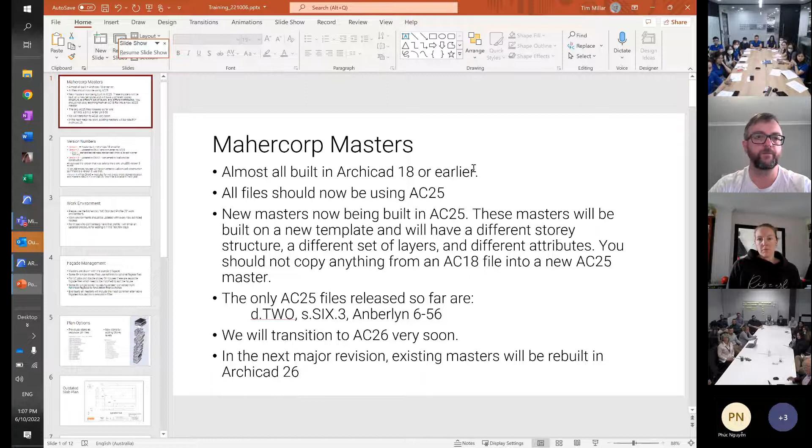Okay, the next thing I wanted to mention was version numbers. Hopefully everybody's across this, but I just want to touch on it to make sure we're clear. All files have a code number and a version number at the end. I renumbered those a while ago - everything that was here already, built in Archicad 18 before any of our recent upgrades, was version 1. It might have been built a long time ago or more recently, but they were all version 1.

Then we brought in DNA 1, a series of updates primarily aimed at the double stories, where we upgraded the staircases, or rather made the stairs standard. So all double stories should now have standard stairs. We also standardized the windows, and there are a couple of other little changes.

A lot of those files have been released, and a lot have been done but not released yet, and we're going to continue to trickle those through. But version 2 looks a bit different to version 1, and we've run into some trouble, because there was advice that in production you have to use the version that was sold, whether version 1 or version 2, whichever is correct.

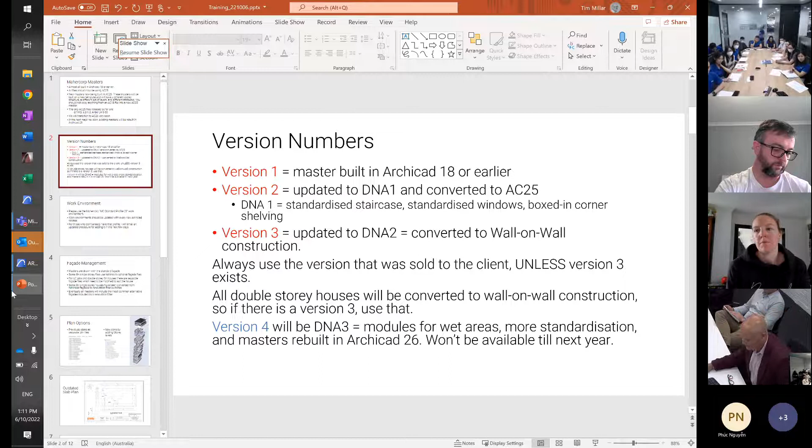Okay, work environment, I'm going to touch on very quickly. Archicad 25 - is everyone using the work environment that I set up in head office? Yeah... not sure, maybe. I would like everyone to use it, please.

For PG, I know I haven't made it available to you. I spoke with Di about this briefly yesterday, and I'm going to make it available for everyone over there as well. It has some advantages - it has a series of shortcuts, and if we're all working in the same platform, it's easier for us all to understand each other.

You will always be able to modify your own work environment, and that's absolutely fine, but we need to start at the same point, and then we can progress from there. If you've got your own particular modifications, then you can do that.

The other thing is, once we get 26, I'll modify the work environment and push out a new work environment for Archicad 26, based on the same thing but incorporating whatever new tools are in 26 - I don't think there's many. So I just want to touch on that quickly. In PG, I'll be forwarding something for you for that.

Okay, facade management. Facades have been managed in different ways over the years. Some of them have still got hot links, some of them have to be pulled from separate folders. What we've been doing is changing them all to renovation filter switches.

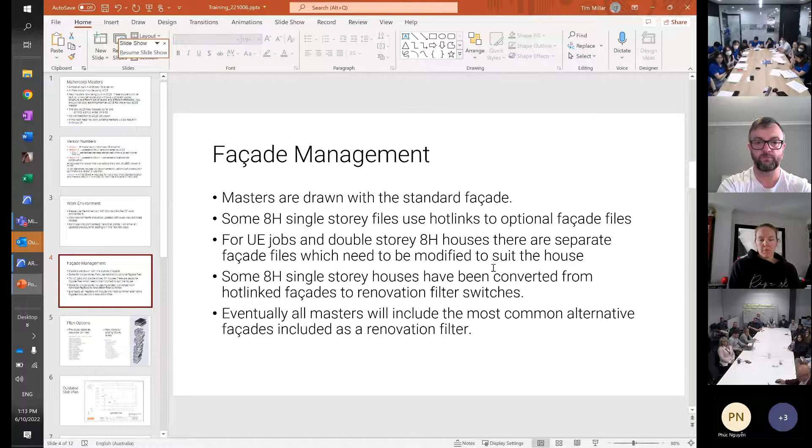I'll see if I can make this work. So far, we've only done it with the single stories. Has anyone encountered one of these yet that Armani has? Anyone else? No one else has seen one? We've done this with quite a lot of files, but they're not all available yet.

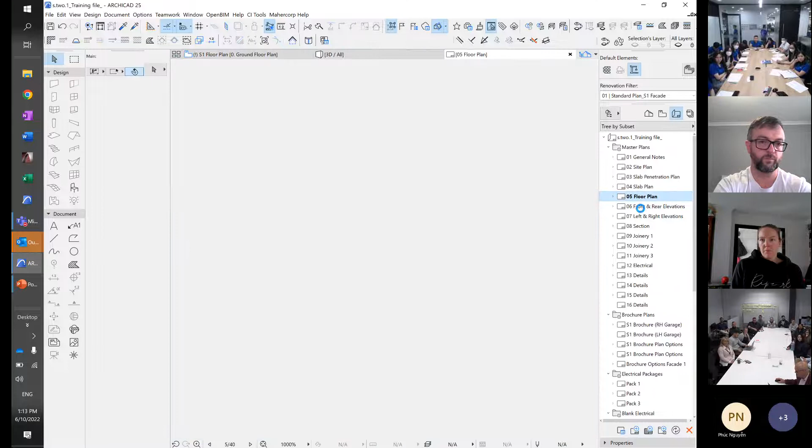We don't want the view layout. So this is the standard master with a standard plan. We have taken the separate facade files and put them into the master and then pinned them with a renovation filter switch. To make this work, you've got to be able to turn on the renovation palette, and we've set up different filters here with each facade linked on it. So all you need to do to change a facade, if a client has selected a different one, is change the filter and the master will change automatically. You don't have to link anything, change any layers, or do anything else.

What we've done with most of them is set up the most commonly sold facades. So I've got the S2, the S3, the S4, the P12 and the P6 for 8 homes singles. Eventually we'll do doubles, and hopefully one day we'll get to UE as well, but that's probably a long way off still. But it's helpful on the higher selling single stories.

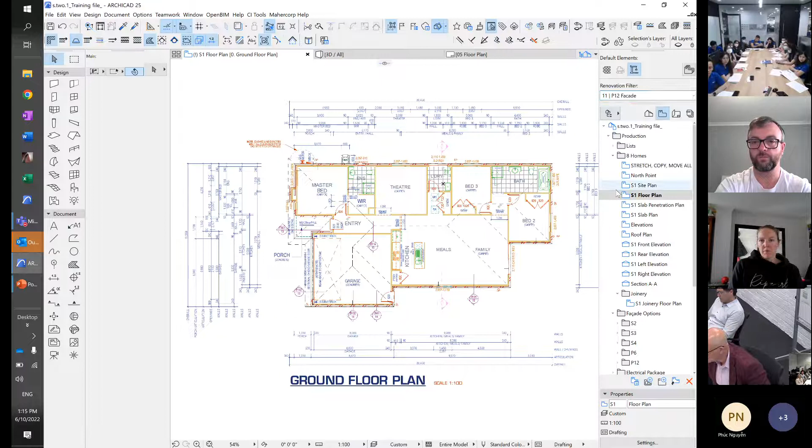It was also being done for estimating. It makes it easier for the timber truss to be able to quote on the jobs. So we can switch them quite easily, very easily really. You just select the correct filter. It works in 3D as well. You can switch there and it'll just automatically change straight away.

So that's going to save time for production when you have to manage facades. I'm trying to get figures, or I've been hoping to get better figures on which facades are sold how often, but we'll keep the most popular ones in there.

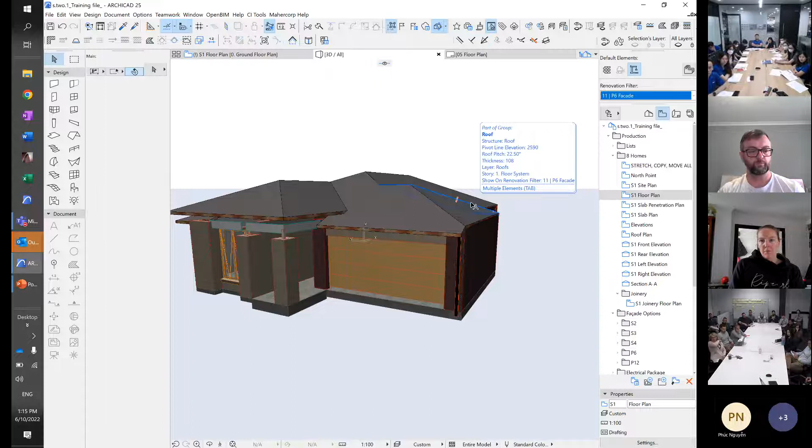This is something that we're wanting to do, but because of the number of facades, the number of houses, we're never going to get all of our files converted like this. But we'll do our best and work through it. Everything's on hold for the time being while we're converting to wall on wall, but we'll get to it.

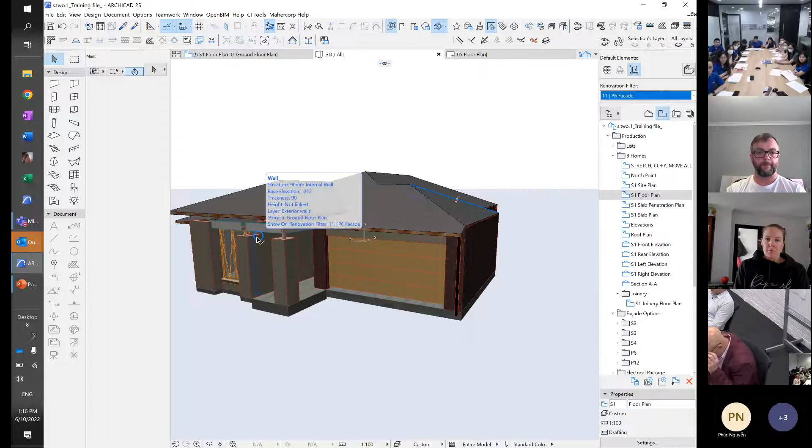So that was facades. Where are we? That's facades. Plan options.

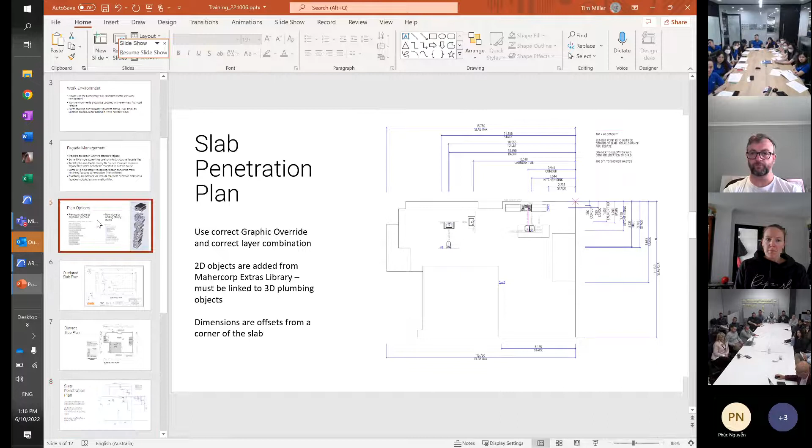Plan options in the past have been done as a saved master with the variation done on the copy.

What we're doing now is taking all the plan options and putting them into different stories within the master. One of the issues we've had is the number of files we have to manage in the development department. There are like 150 different masters, something like that. Every master's got 10 plan options and however many facades.

There's just way too many files. So we're trying to incorporate all the elements of each master within each master file, so there's less management of different numbers of files. So facades are done with the renovation filter switch. Plan options will be done as different stories. So you can see, I'll show you with the Jardene.

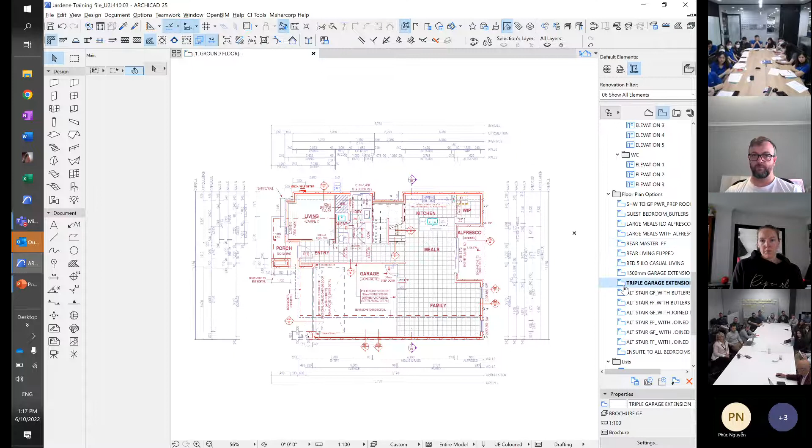So that's the plan. You can see in the views, we've got floor plan options, and each of them are named there, and they're within the master as a different story.

The plan options are still being only managed at brochure plan level, so you'll still have to do a bit of work to tidy them up. When you copy them from this story and put them into the main master level, there's still going to be a bit of tidying up to do, but at least they're there in the same file.

And then if a change is made to the master, we'll update the whole master and not have to manage a whole bunch of different files.

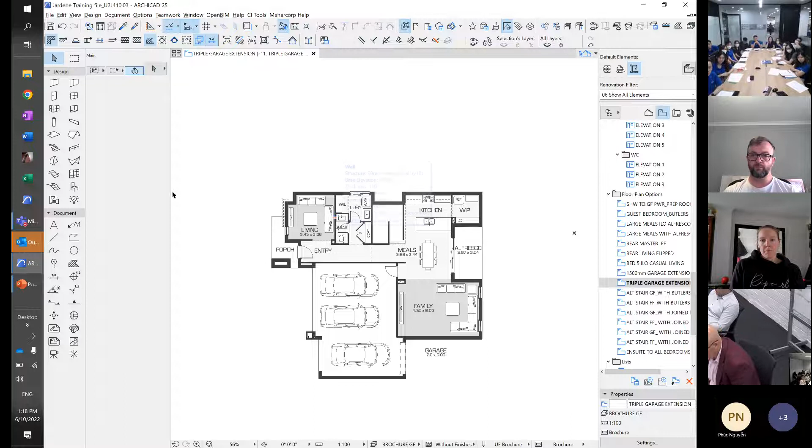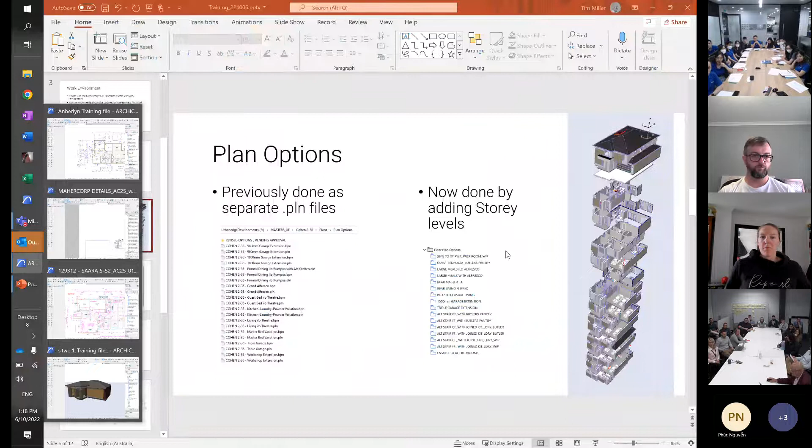Because they are, if we look in 3D, that's not 3D. Oh, it just shut itself. Okay, that's a screen. This on the right of the slide here is you can see a shot from the master in 3D. You can see all the stories are, all the plan options are stacked together.

They're all in their correct position relative to the floor plan. So you can use trace much more easily than if you, so you can see how the elements relate to each other within the file. So if you turn trace on, you can see what you need to remove from the main level before you copy the new elements back up.

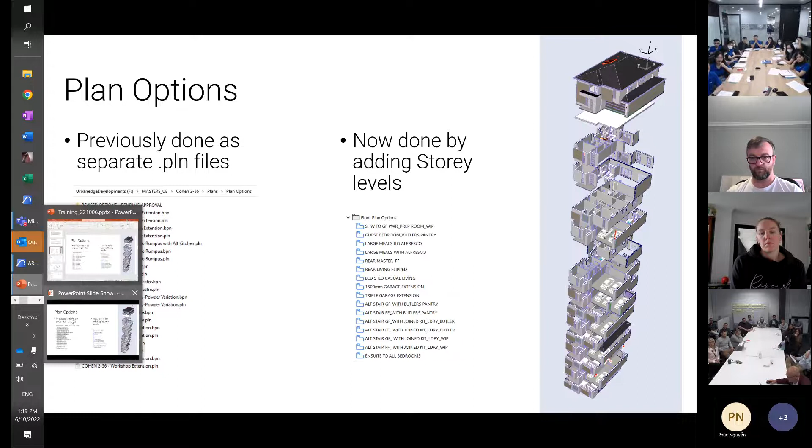Now, I want to just talk about a couple of the plans that we've been adding. The slab plans have been in our masters for a long time, and they look like this. As we've been working on the masters, we've been trying to improve the slab plans, and they now look like this.

I just wanted to mention it and show them both because I thought I saw an occasion the other day where the plan had been reverted back to the earlier version. It might have come from one where it was version 1 rather than version 2. But if you've got the updated slab plan, please use that. If you have the old slab plan, then and we have to use it, that's okay.

But this detail down in the corner is not much good to us. It really doesn't do anything except show the dimensions that are already on the main plan. It's not very helpful. We have updated the detail of the corner of the garage, and that will be in the details manual.

I'm going to go through that a bit more probably next week. We'll confirm how we're going to use that detail, but this detail in the corner of the garage has been causing some problems on site, and we're going to change that. We have changed it. It's just the detail hasn't worked its way through the masters yet, but I'm going to push something out so that we can get that updated. This particular detail, with just these enlarged dimensions, is no good.

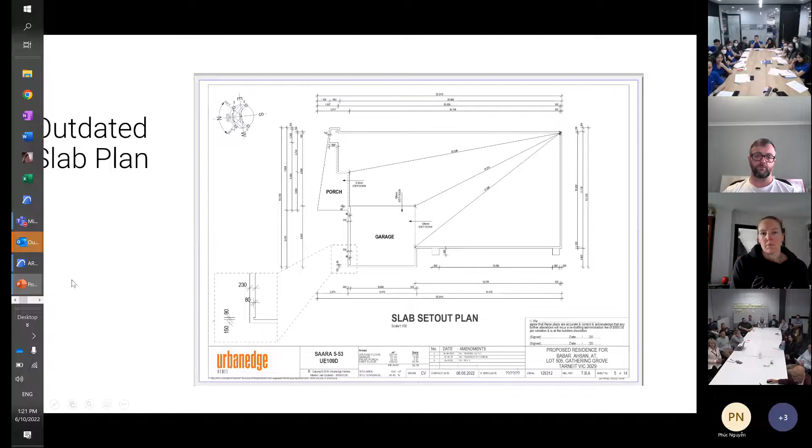So on the updated slab plans, the dimensions go to the outside corner of the slab so that the concreters can measure their boxing and make sure that it's been done properly before they pour the concrete and discover that it's wrong when they check the dimensions. That's a small detail, but I think it's helpful.

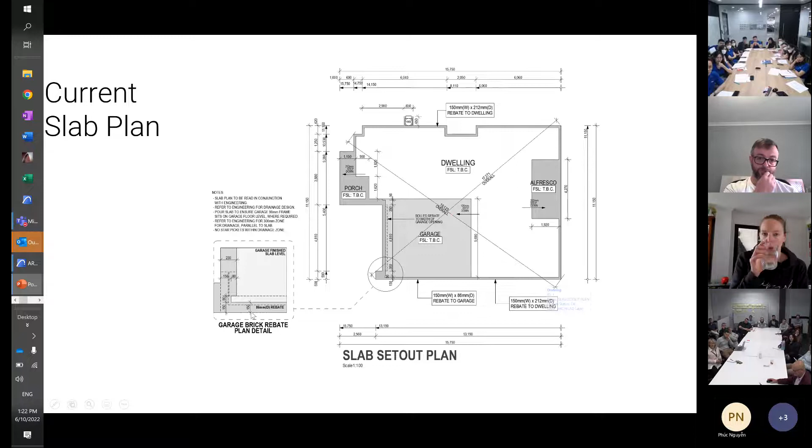The updated slab plan also has running dimensions, which concreters, I believe, prefer to use when they can. And we've got some shading just to make it a bit clearer where the boxing on the slab goes. So they're being built into all the masters, and they'll continue to be updated. You can see the difference in the detail here. This isn't the updated detail, but we're going to change that fairly soon.

Next one I wanted to talk about was the slab penetration plans. These have been overdue in our masters for a long time. The plumbers have been asking for them for as long as I've been here, and I believe before that, and they should have been on the plans, but we haven't been able to get them on. So they're being updated now, and a lot of masters have them now.

I'm not going to be asking production to add them if they're not there, because it's a bit messy at this stage. We might get to that, but not at the moment. So if they're in the master, you can use them. But a couple of things I want to just point out. This is the format of them. They're very simple. It's the shape of the slab and only the slab penetration points.

So we turn on the wet area fittings, and then we have to add a 2D element which is aligned to the 3D object that's already in the plan. The reason for that is that the penetration point doesn't always line up with a convenient hotspot on the 3D object. If there was always a hotspot in the correct place, or if I had the object editing knowledge to put a hotspot in the correct place, I could maybe fix that, but I don't have that knowledge. So what we've elected to do instead is to add a 2D object that sits on top of the 3D object.

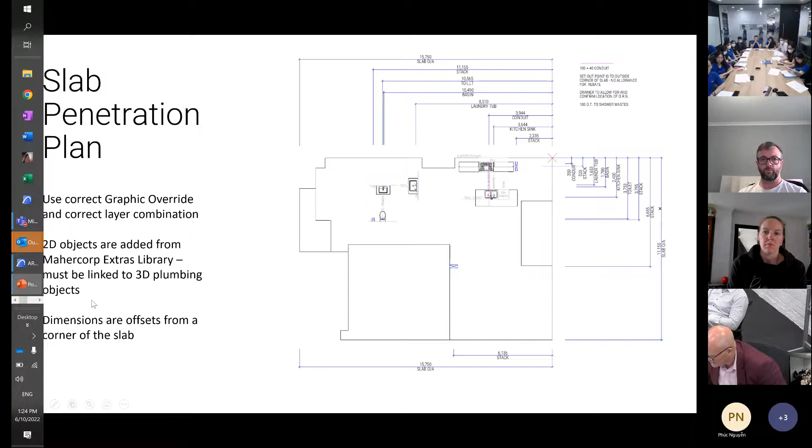The other thing is that you could, but I do still want a separate slab plan to a slab penetration plan, because the plumber wants the slab penetration plan. He doesn't really care about what's going on with the slab. He only needs to know where it's going to be. And the concreter wants the slab plan, so there's different information on it.

You could combine them, but for tradies that have got very specific jobs, I prefer to have a specific plan for that trade, so they can pull that sheet out and that's all they need to know, and they can move on after that. Similar to electrical plans, we have separate electrical plans because our electricians need to know that information, and they don't really care about all the other information that's bundled into everything.

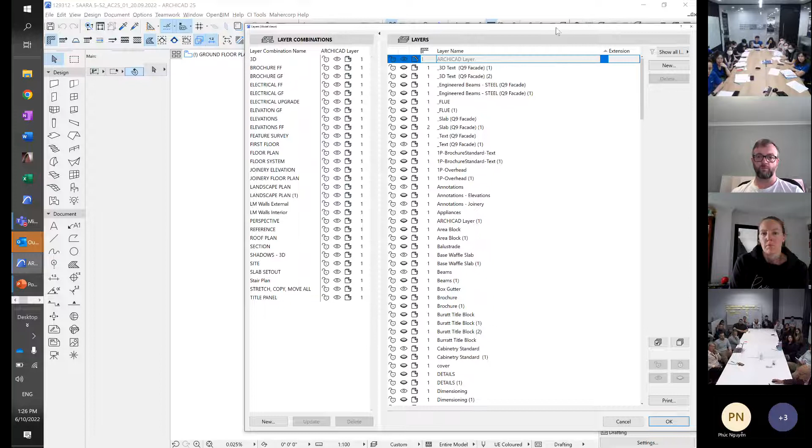Attribute management. There's been an issue with duplicate layers occurring in some masters. Why didn't that come up? Here we go. If we have a look at the layer structure for this plan here, you can see that there are lots of duplicate layers with a little number after the end of them to indicate that it's been doubled up. Now, I've been trying to reproduce this error and I haven't been able to do it. Does anyone know exactly why this occurs?

No? Isn't it just when you're copying objects over and then you just keep adding the layer? It could be, but I wasn't able to reproduce it. So I just wanted to talk about a couple of issues that are related to the same thing. Layers are attributes, they have attribute numbers. The first thing is that you should be careful when you're copying anything from one file to another, not to copy more than you need. Copy the element that you want and put that in. Don't highlight a whole drawing and then drop that in, because you'll get a lot of duplicates that you don't need. That's the first thing.

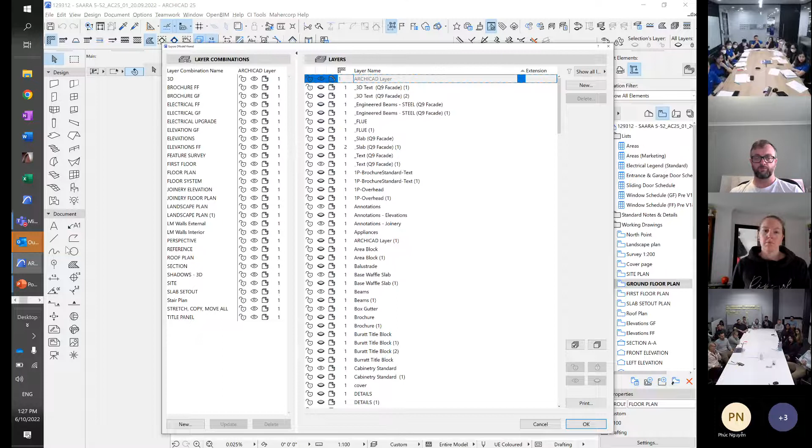Second thing is if you've got two things with the same name but a different attribute number, you can sometimes get duplicates. I wasn't able to reproduce that here, but I believe that can sometimes be a cause of the issue. The other thing that may be related to this is when you copy... go back to my slide.

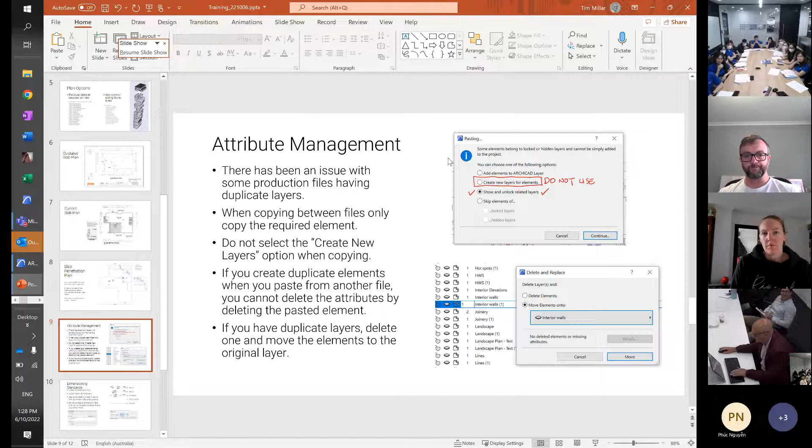When you copy an element from one file and paste it into another file, if the layer that that element is on is turned off, you'll get this warning message here saying you can't simply add it, you have to do something. You can either add it to the Archicad layer, you can create new layers for elements, or you can show and unlock related layers.

I wouldn't have thought people would be creating new layers, but just in case you're thinking about it, don't. That will create new layers. I don't think it's what's caused this issue here, but just in case, don't do that. Show and unlock the related layers, or add it to the Archicad layer. It's fine to add it to the Archicad layer and then assign it to the layer that you need. That will actually probably work better than trying to paste the layers in and creating multiple attributes when you copy across. It's a bit more mucking about though.

The other thing is try and minimize the amount of copying between files. I know it's really important and unavoidable to do that in production, but if you can avoid it, if you can create something within the file, I'd prefer you did that. I know sometimes you just have to copy between files, so if we have to do that, we have to do that. I know we've got a lot of reference files in production that are being used.

We are going to work towards phasing those out so that new masters make a lot more use of favorites, and that everything you need is within the master when you start. So you won't need to go to reference files. There'll be mod files, there'll be links, but we won't be using separate reference files as much as we rely on them now. I know it's unavoidable for the time being, but we're going to work away from that if we can. And especially when we start building in Archicad 26, the favorites will be built in as part of the file.

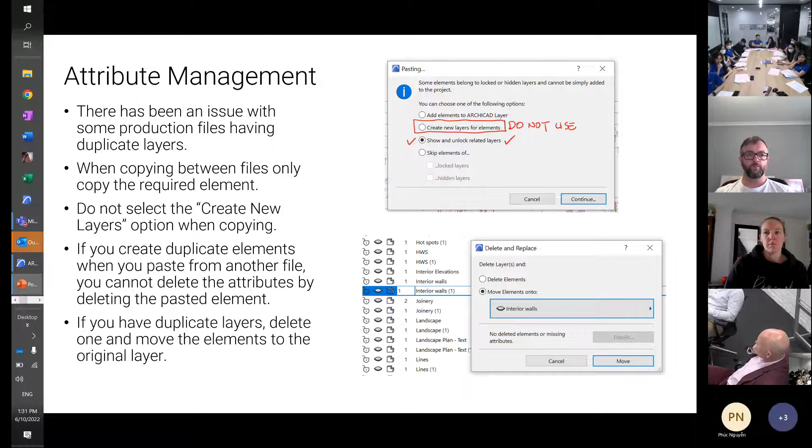The other thing is, if you do have them, please, can you tidy them up? What you need to do is, if you've got duplicate layers, like on this example here, where you've got interior walls and interior walls 1, delete one of the layers and move those elements onto the layer that you need to keep. If you don't clean it up like that, you're going to mess up layer combinations, and you'll mess up area schedules, and all sorts of things will be wrong. So this file in particular that I was looking at was a real mess, but it's happened in a few, so please be mindful of it, and please try and clean it up if you see it. Okay.

Purging is fine in production. We're not going to do it in masters. Has anyone purged layers or purge attributes now, or we don't do that? No. Essentially, because we've got such high turnover in production, if we get a file and it's a mess, we just leave it a mess, yes. Do our change and move on. Yes, and I understand that, and that's the way it is.

And what I really want to do is make sure that everybody in production gets fewer files that are a mess. I would really like to change that, and we're working towards it. It's not always from masters. It's historical. There's a lot of issues. We're going to change it as best we can. Production doesn't really have the time to clean these things up, but if there are issues created, then let me know. If there's anything I can do in the master to reduce that, then we will do that.

I think there's a lot of scope for our drafting, production and efficiency to improve. I don't think it's necessarily recognised across the company how much scope there is, but I think we can make a big difference as we continue to improve the masters and improve the efficiency and the quality of our drawings. And we're going to get there.

Dimensioning. We've changed our dimensioning standards. I sent out a document, and I don't know whether everyone here has seen the dimensioning standards document. It's available on the F drive. It's just a couple of issues. In Archicad 25, it's now possible to add room names or notes underneath the dimension. It wasn't possible in Archicad 18, so none of our masters had that. Does everyone in PG know how to add a note underneath the dimension? Don't know. Everyone here knows how to do it? They've been doing it? Yeah, okay, so we're all good with it.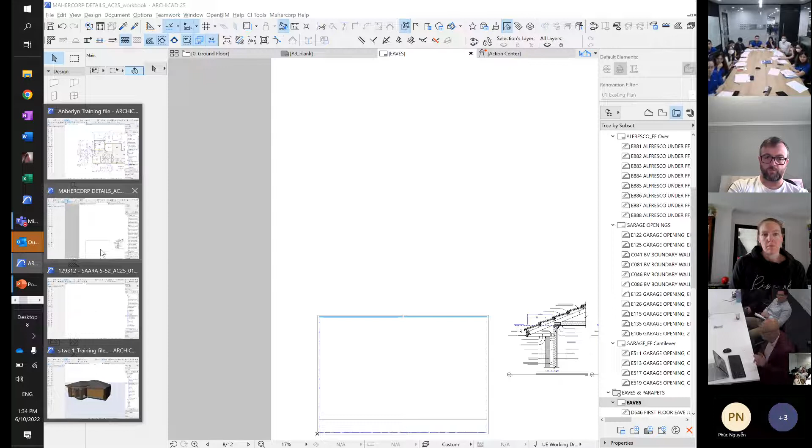So please, I'm not expecting production to redo the dimensions when they come from the master, and maybe they're not perfect. You might have to tidy up a little bit, but you're not going to redo everything. I understand that. But it would be great and help clarity on site if we at least added the room names if they're not there. If you can take the time to do that much, just to tell people where the dimension is, it makes things a lot easier for tradies on site, for carpenters to read a set of dimensions. So if possible, if the dimensions aren't that clean, just check them and improve them a little bit. Again, in masters, we're going to keep on trying to improve the dimensions and make sure that all masters that come through are as good as they can be.

How do I make that go away? There we go. Yeah, that's better.

Extended witness lines again. Well, we're going to do that. I'm not going to get production to bother with that. I think dimensions look a lot better if you connect related dimension lines. Don't cross the dimension line with an unrelated witness line. I did see that the other day. It's not good practice, but hopefully fairly basic.

Okay. Sorry, Tim, just with that one. Yep. So if you go to see how there's the two 240 mils. Yep. Would you connect those two, or would you leave? Yeah, those, yes. And so you've obviously got an overall at the top of that, which isn't shown. It's off to the... yes. Yeah. Sorry, it's the other way.

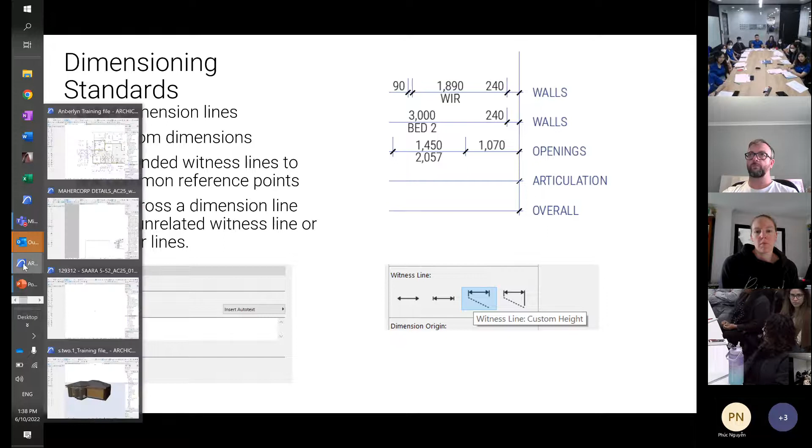Would it be worth moving openings to the very top, just so articulations can line up with the walls if you want to? No, the openings still show where all the ends of the walls are, because it's still showing the gap to the window and then to the corner. Your articulation will still hit that corner. Yeah. So, okay, we've got articulation runs through, and then the openings are broken by the articulation lines. So the offsets in the openings are on each length of wall, not across the whole wall.

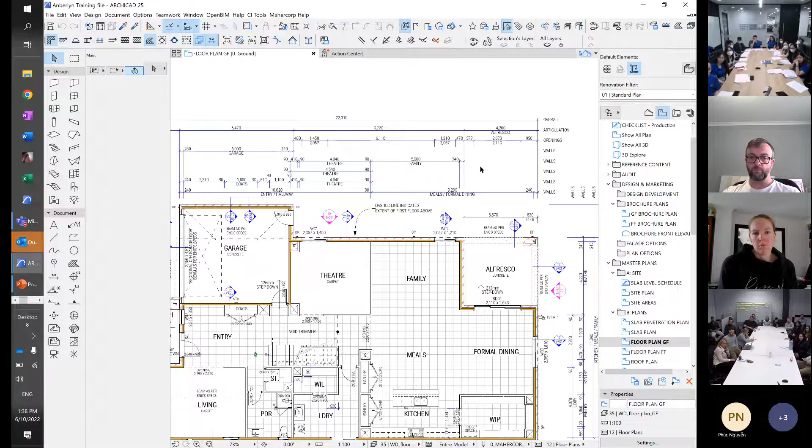Again, it's done that way because it works better for brickies. It's the tradies who are reading it, the carpenters and the brickies. So we want to set it up in a way that makes sense for them. So that's the way we should do it. Now something crossed my mind. So the number of wall lines there, I just want to mention. It just says walls, walls, walls, and they usually relate to a straight line through the building, more or less, give or take.

I have in the past... I'll show you this idea. I've added it to the Anberlyn. I think it works, but I don't know that it's worth the trouble. So you can see I've added grid lines here, A, B, C, D, and then down the other way I've got grid lines of 1, 2, 3, 4, 5, and on the dimension lines I've labelled the wall line by where the grid line is. So you can see very easily on the drawing where the dimension line runs through the house, and it's much easier to read what's going on.

I think it's a good system, but I've kind of decided it's too much trouble and it's not worth enough to follow through. But it's in that file, and it's perhaps worth bearing in mind on a big house like the Anberlyn. Occasionally it might be justified if it gets really confusing and you've got a whole series of dimension lines, just to clarify where they are. But anyway, I've done that, but we won't follow through with that one. Okay.

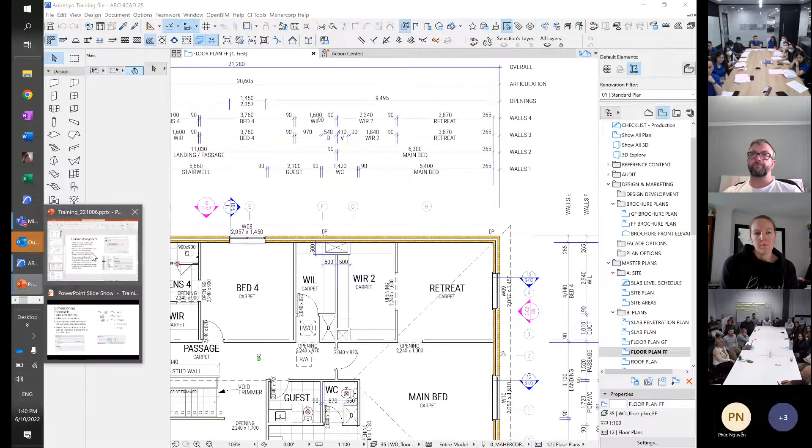Attributes, dimension lines, details. Now, how are we going time-wise? We've still got a bit of time.

Details have been a big issue, I know, and we're continuing to work on them, but we've been derailed for a little while. We have an enormous number. Chris has done a huge amount of work on drawing details, standard details for the whole company, across our range, and there are a lot of resources available that we have not yet properly implemented.

In the masters now, the details are going within the drawing set. I think that's the case with pretty much. Is that happening in all files, or are you still getting associated details? Most ones that are in Team 2, so the ACC space or production space, they're all still just associated details. They're still associated details, yeah. So we're working away from that.

Sorry. I think the S3, the new master, it's got details in there. Yes, I think that's the new ones. Version 2 and version 3 should both have details within the working drawing set, and we will be working towards that being the case for all masters. It hasn't seeped through yet. When the masters are done, they will include a set of standard details.

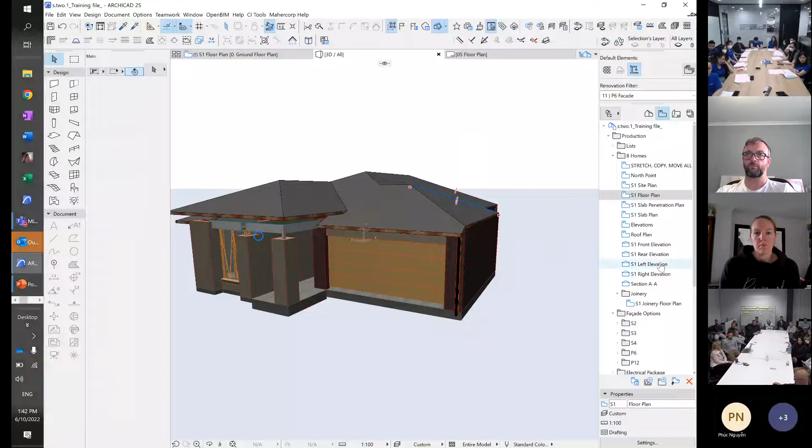So it'll look like this. Everyone will have seen these, yeah? So they're coming from the details manual. They're coming from the details manual, but if we copy them directly from the details manual, then you have to set up a link to that drawing back to the details manual, which can be a bit of a pain.

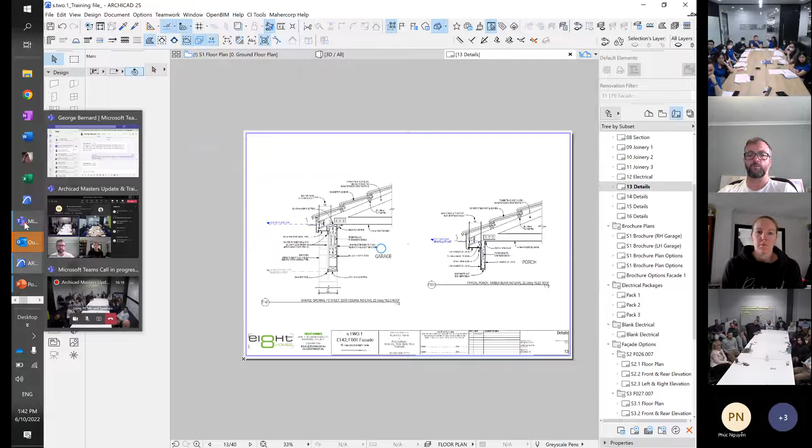I'm working on putting together a details workbook, which is like an interim file that will include most of the most common standard details that you might need, that you can then drag and drop from the details workbook into the production drawing. Masters on the whole will have them, but if you're going to add them, we'll have the details workbook, and you should just be able to add that easily.

If we have a look at the settings. Is that going to open for me? Oh, it's tired. There we go. So you can see the source file of that details drawing is going back to the Mahercorp details manual. It goes back to the F drive.

If you open the details manual and just copy the drawing directly from the details manual, because within the details manual it's an internal file, it will maintain an internal path and it won't be able to find it. So that's why it's helpful to have an interim file, a details workbook. There I've collected all of our common details, and then when you copy it from there, it remembers its path.

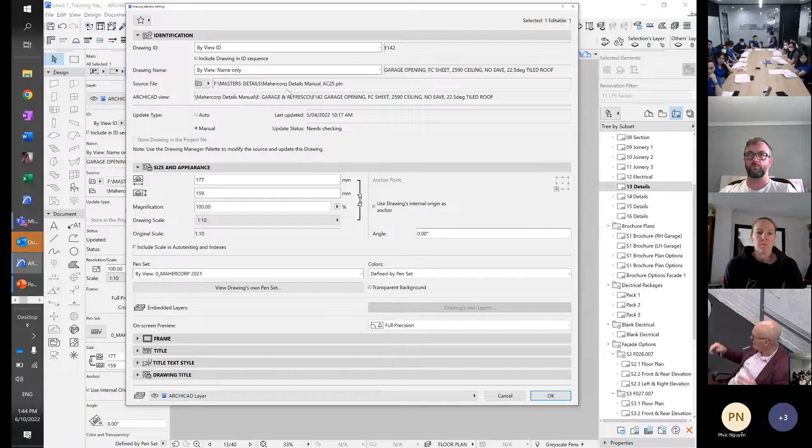So at the moment we have a reference file that has a lot of details in it that we're using in masters. I don't know whether production are using it as well. No, we're not. I'm in the process of setting up a workbook where we'll collect the most common details, and you'll be able to use it as a reference file. You'll just be able to copy a drawing from the details workbook and drop it into the production file, and it will work perfectly and stay up to date.

I'll put more information out about that in the next week or so. I was hoping to get it finished by today. It didn't quite happen.

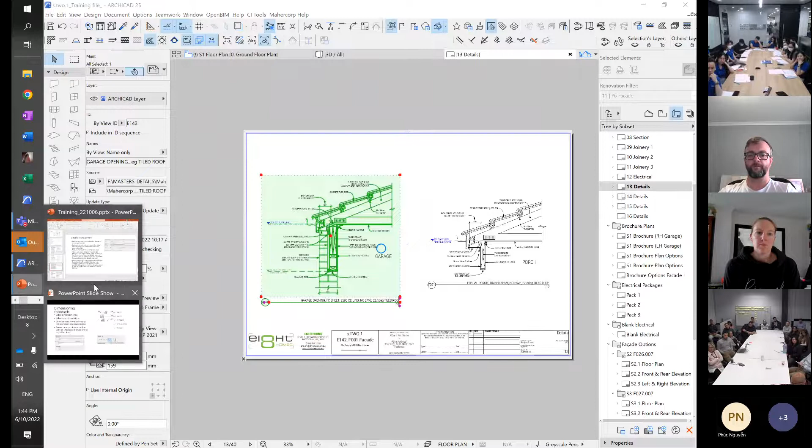Last one. I'm going to finish ahead of time. That's good, isn't it?

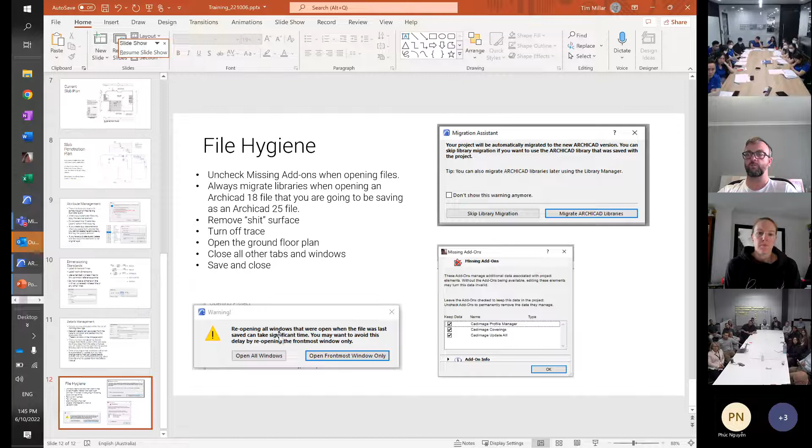This is like small issues, but I'd just like to mention, I think they're easy issues. A couple of things: when you open a file, if you can see this, if you don't close all your windows when you close a file, you increase the opening time the next time the file opens. Also, if you leave trace on, you increase the opening time. So when you finish with a file, as standard practice, I think everyone should, on one of the tabs, right click, close all other windows, turn off trace, and then close the file.

Then it opens as fast as possible next time. So you're not opening windows unnecessarily. You don't get this message saying reopening all the windows is going to cause extra time.

When you open one of the older files, if you get this message about missing add-ons, just uncheck all those add-ons. You don't need them, and it'll just save you getting the error message next time. It just saves a few seconds when you open it. I find error messages when you're opening a file really annoying, so I like to manage the file so that you don't get that next time.

Now the other one is the shit surface. Someone thought it was a good joke a few years ago to create a surface called shit, and I don't know that it's caused us trouble yet. It has caused trouble - it went out on a Windows schedule to a client. So it's dangerous, we don't want it going out on a file by mistake. It's really easy to delete that surface - if you open a file, just check your surfaces and delete it, it saves hassle further down the track.

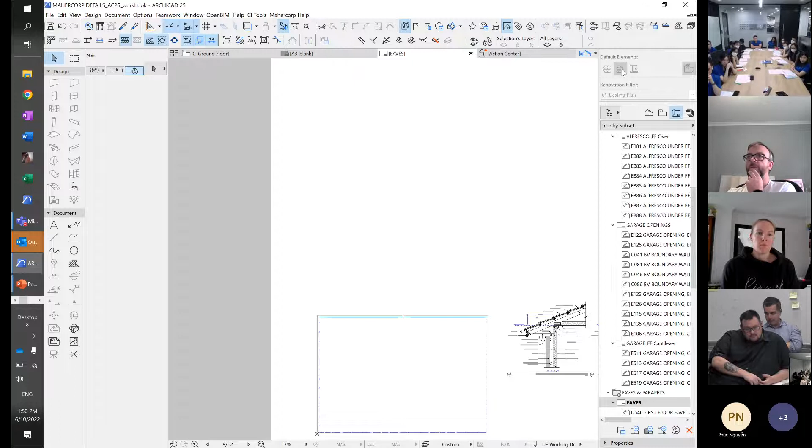So you do need to be careful with that figure - it's a live figure, you can update it, but you have to be careful with it. On the drawings we're still using, it's not the live version yet - it's still text, and we're still going through the schedule, clicking the walls that we want to measure. Okay, so you're covering off the fact that it's not working, which is important. On the newer masters, we have rewritten the schedule so it's got a live schedule that will update and give you a correct figure. I think that hasn't necessarily been recognised by everybody yet, but it is there.

In the newer masters, in version 2 and future versions, there will be a schedule for linear meters on the walls. Area schedules, I know, is another issue - they haven't been live either for squares, and they will be on the next version. But we're working on it. Okay, so that's it for now.